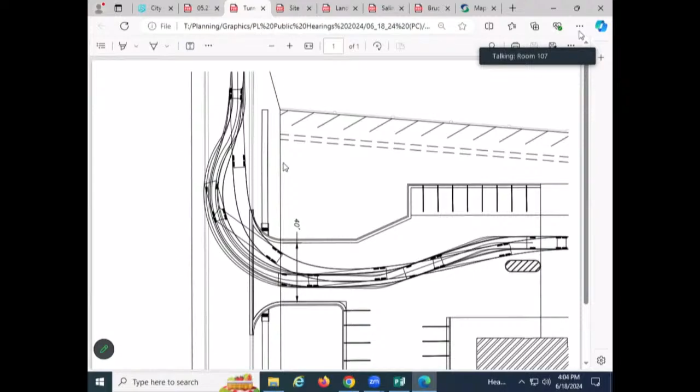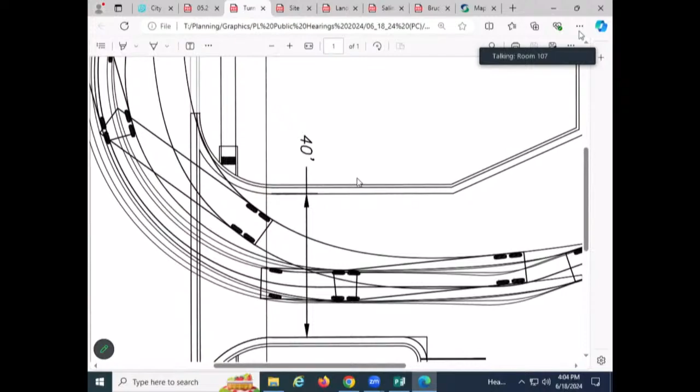Now, when we looked at the revised site plan, we noticed that the opening was 43.5 feet. And when we looked closer at the truck turning template, we discovered that the 40-foot opening that was noted was from the edge of the front end of the concrete curbing apron to the edge of the curbing apron on the other side, rather than face of curb to face of curb. So what that means is the site plan would have to be modified slightly so that it fits within the 40-foot opening that the engineering staff has approved. It would narrow the curb cut opening slightly, but not a lot.

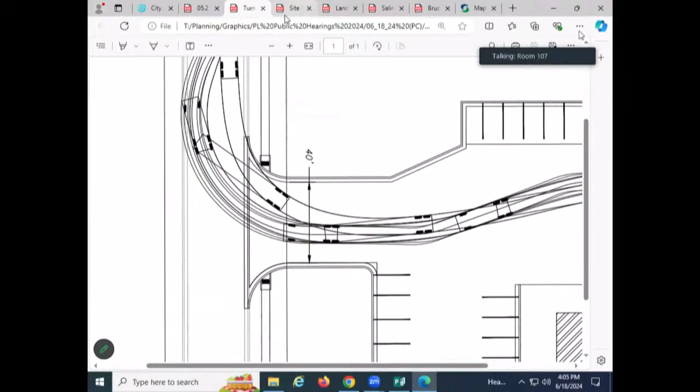So here's the actual site plan, and if you were to measure at the property line, curb to curb, face of the curb to the face of the curb, you'd come out with about 43.5 feet, and so they'll need to narrow that to 40 feet, but that would still fit within the template dimension that the design team has come up with. So on the first item, we believe we do have a solution - a turning template that shows a 40-foot opening would be sufficient. We just need the site plan modified to show the 40-foot opening that the engineering staff has approved, and that would take care of that.

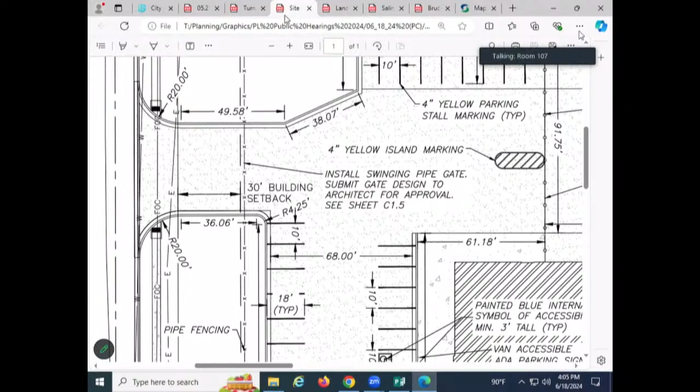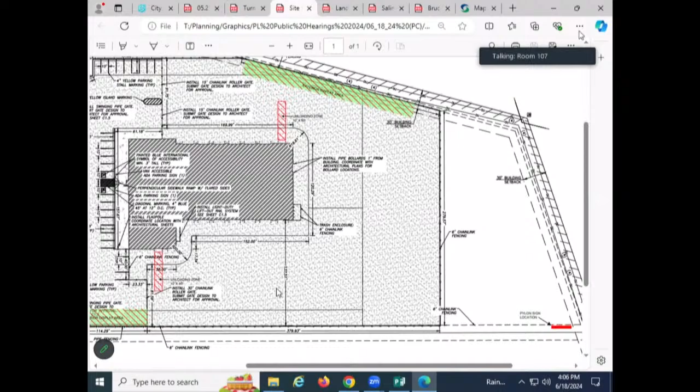The second item was the requirement that all maneuvering, driving areas, and parking areas have to be paved. The design team modified their surfacing, pulling it further to the west. In previous plans, the surfacing went all the way back to the back property line, except for a green space in the southeast corner. They've reduced the surfacing area, and rather than a gravel or crushed milling surface, they've proposed 8-inch thick concrete throughout, so as a truck works its way around the property, all of the maneuvering area as well as the off-street parking area will be paved.

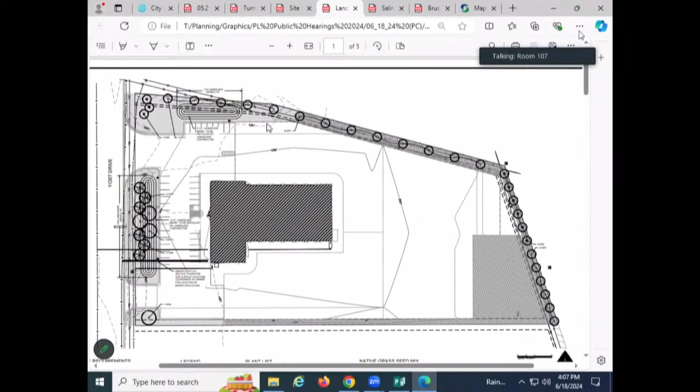Landscaping was the next topic. One challenge of the site was overhead power lines along Waterwell Road and I-135. The Planning Commission previously discussed allowing a substitution of ornamental trees in place of shade trees, so those trees could be planted in the front 30 feet along these frontages without interfering with overhead power lines. The applicant revised their landscape planting plan to surround the property on all three frontages with trees, using ornamental trees instead of shade trees because of the power lines. That sufficiently addresses our previous comments on landscaping.

For drainage, a drainage study was needed as part of the platting of this property in 2023. The applicant submitted a copy of the drainage study to the Kansas Department of Transportation for review. A staff individual with KDOT has opined on the plan, but we still do not have the KDOT right-of-way discharge permit, which is always required when right-of-way is adjacent to a property directing water into it. Those discharge permits ensure we don't have erosion or water that would overcapacitate KDOT's right-of-way drainage system.

We do have written email correspondence from an individual with KDOT saying the plan looks good, so we're on the right track, but we still need an actual discharge permit showing the plan approved by KDOT. We've made progress, but haven't yet gotten the full permit required before a building permit can be issued. Staff believes that can be worked out after this board meeting as part of the building permit process.

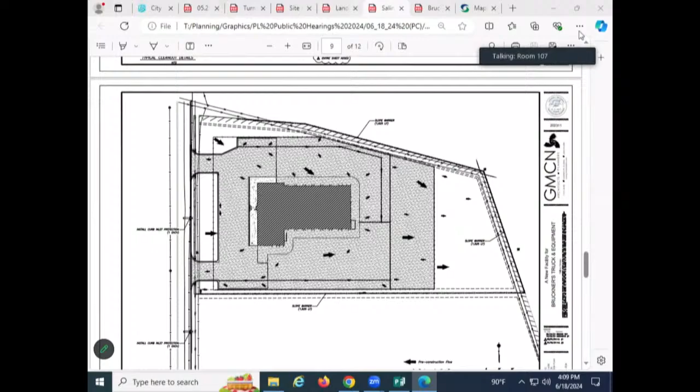I'll see if I can... I'm trying to get to my drawings here. It's not... give me a moment.

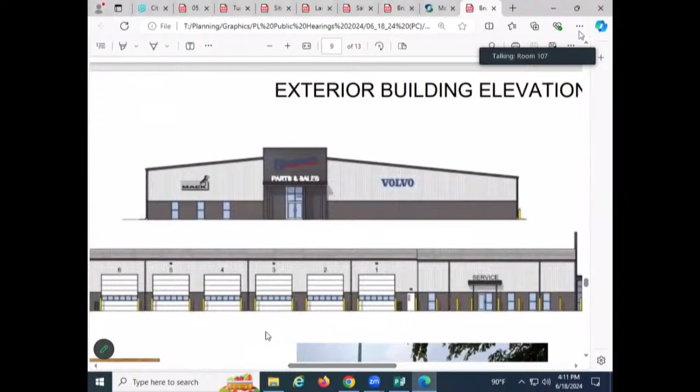And this is the color rendering of that same submittal. You can see that both the front facade and the surrounding facades have that same characteristic, with gray wainscoting and white upper body exterior color. These are the black and white images of all four sides.

So that's the exterior that is being proposed, and we feel the applicant clarified that well in their last meeting.

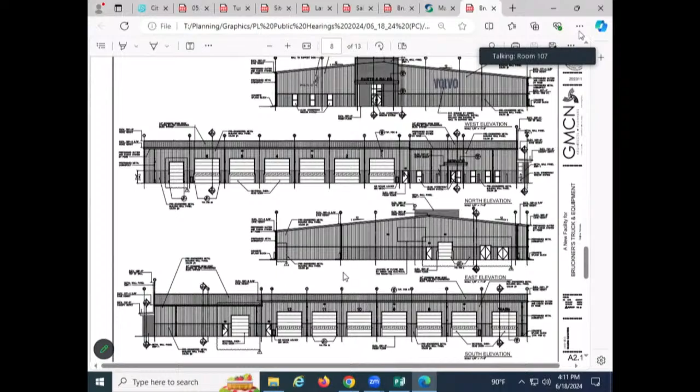The seventh item to address would be that a public sidewalk along Yost Drive would be required, and the applicant has that on their plan and is proposing to construct that. Last of all, we need to make sure that all drawings submitted for building permit review have an address that notifies this property as 3615 Yost Drive.

So those were all of the different correction items we've been working with the applicant on. We believe they have been sufficiently addressed, or nearly addressed, where the Planning Commission could approve the proposed plans, and the minor details still left to be corrected can be taken care of through the building permit process. So we do have a recommendation that the plan be approved with a number of conditions, listed on pages 16 and 17.

As part of this, because it's a planned development, we not only review this as a conditional use permit, but anytime we have a planned commercial project, the Planning Commission reviews and approves what we call a final site development plan, and that will also be required here. In this case, the information submitted is the same information you'd have on a final site development plan, so we feel that going through this conditional use permit review is the same as going through a final site development plan review. However, we need an actual document at the end of this process labeled as a final site development plan that we can stamp approved and put in the file.

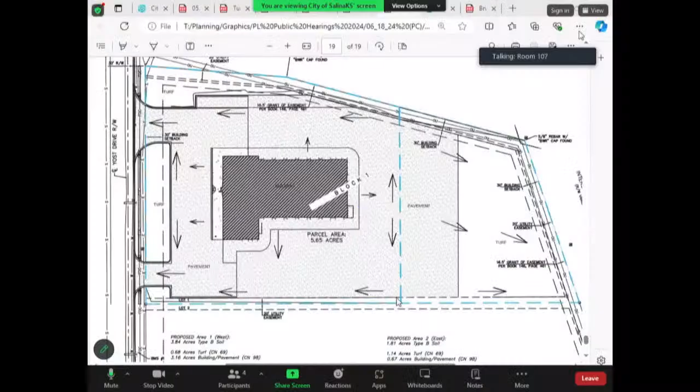In this case, if we look at the drainage plan — I'll pull it up. So this is the drainage plan. I don't know how well it shows up, but all of the building water runoff and the pavement around the building is designed to work its way either to the north and then to the west, to the south and then to the west, or even to the east, south, and then west. So this blue line you see here — the site is going to be graded and constructed so that water will flow from this blue line to Yost Drive.

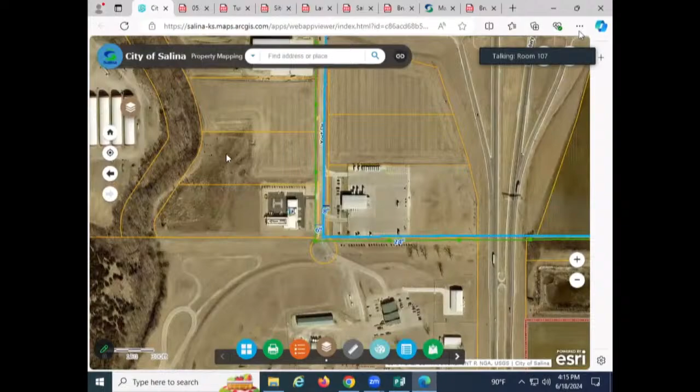And underneath Yost Drive, we have an inlet system with pipes that captures the water — let me get the aerial photo. It captures it, and this big borrow pit drainage detention area back here is designed to hold water in drainage and storm drainage situations. So water gets to Yost Drive and it gets piped back to this borrow pit detention pond at the southwest corner of the Yost addition. That's how drainage on the site is designed to work.

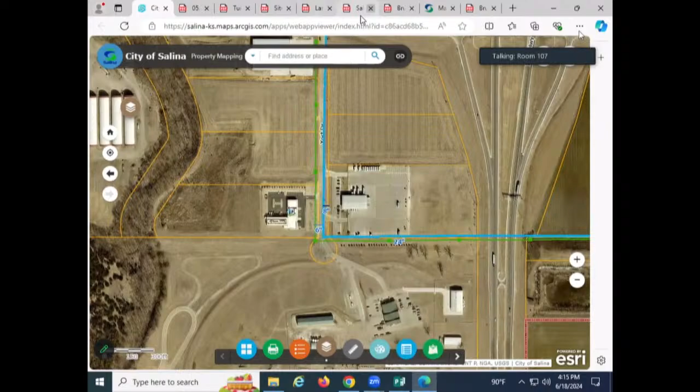Most of the drainage is directed to Yost Drive. However, there is this eastern portion here that is intended to sheet flow over into the KDOT right-of-way undetained, and that's what we need the discharge permit from KDOT for, because they've always required that for any instance when water is being directed onto their right-of-way. So, as it's getting to be a long answer, the idea is that we get water going where it needs to go. In this case, we'd capture the runoff from the building and make sure it's going to the west, to Yost. And that was my disconnect — when it was funneling toward Yost, I wasn't sure about the discharge or the extra permit from KDOT, but yeah, I see the backside of it. I got you.

And Dustin, I kind of have a question along those lines too.

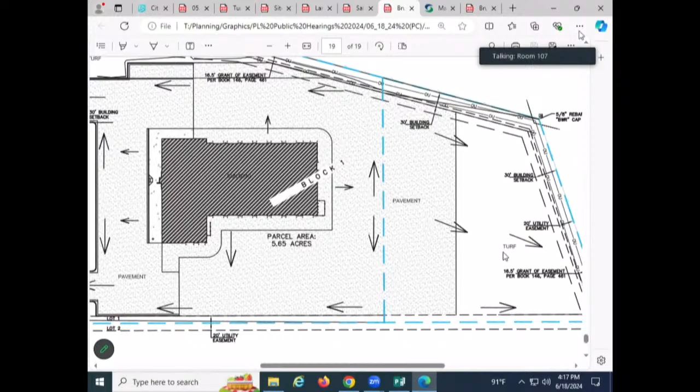So that area that they changed had originally been pavement or some kind of multi-surface material. Is that going to be green space now? Yeah, so if we zoom in here, all of the patterned, shaded area that you see is pavement, 8-inch concrete. Once you get east of this black line to the white open area, that's going to be turf grass. Very good, and that'll slow down that water flow. That will slow it down some, yes. Okay, very good. Any other questions of staff?

On the KDOT right-of-way discharge permit, to your knowledge, can the individual from KDOT who said your plan is good issue that permit? We're not sure about that, which is why we're not sure it came from the right source. The other part we'd like KDOT to clarify: we looked at an aerial photo of the whole I-135 corridor and found about 15 detention ponds that drain into the KDOT right-of-way. This is the only project we're aware of that KDOT has supposedly approved without a detention pond controlling the release. The email we have isn't really sufficient, because in every other case they said you can only do controlled release out of a pond, and in this case they didn't say that.

So we want to get that clarified. Up and down the corridor you have Long McArthur, Ford, and Marshall Motors with a pond that discharges. Menards has a pond and discharges. Walmart has a pond and discharges. Olive Garden has a pond behind it that discharges. There's one behind the Goodwill store too, and in every case KDOT says you can only discharge out of a pond, you can't just drain your site into the right-of-way. So we think we're in a good position, but we want to verify that through the right-of-way discharge permit, because that will have the details and we know it will come from someone with the right authority. Every one in the past we've had is from the District 2 engineer, and this email is not from the District 2 engineer.

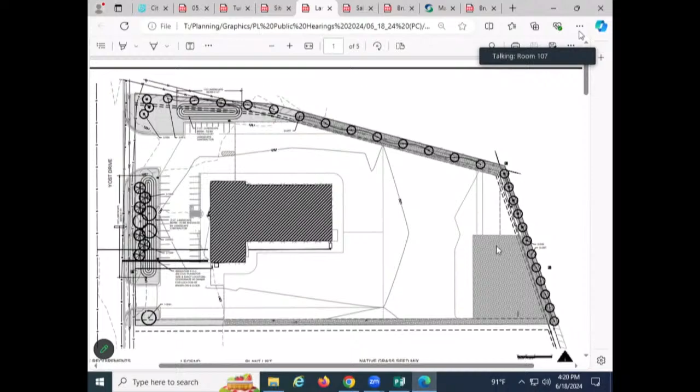If you go back to the landscape plan, I kept looking at it and kept saying, this must be a detention basin. I kept asking, is this a detention basin? The answer kept being no. We don't propose a detention basin, but if KDOT is approving this without one, we just want that spelled out in a right-of-way permit, because that's different than what they've done historically up and down I-135 and I-70. Even out where Foley Equipment and Kenworth is, there's a pond that discharges into the I-70 right-of-way, and they would only accept discharge from a pond. So, this is a pretty small area, though.

Can I jump in and add a little context? I'll be sure to contact KDOT and see what they say. I think the reason is that right now the water on that site is all headed toward I-135, and we are discharging at a slower rate than it's leaving now. So I believe that's why they're saying they don't need a pond—it's leaving the site at a slower rate per the drainage study than it is currently. So, worst case scenario, if KDOT says you have to have a pond, you could work with staff and get that done? Yes. Okay, very good, thank you.

Any other further questions of staff? This is a clerical question, forgive my ignorance, but why are some of these answers in red and some in green in this paperwork? Approved or not approved? Yeah, so I tried to make it easier to read, and maybe it made it worse. Below is a list of issues and how Bruckner's design team has addressed each item.

Items colored in green have been satisfactorily addressed, while items colored in red are still needing to be worked out. So the idea is that I went through the list we previously had. I didn't change the list, but I added in the red items that still might need a correction, even if it's slight.

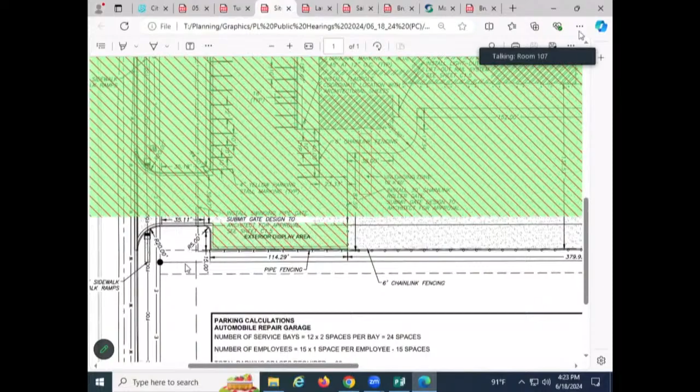Yeah, so if we were to zoom in on the site plan. Well, when I zoom in it's getting weird on me, it's giving me some lines. But there's a sidewalk right here behind the property line that's being proposed, or right in front of the property line, off the property line in the right of way that's being proposed.

And that is required for all new development. So all new subdivision requires public sidewalks on public streets. The only exception to that is if you have a cul-de-sac or dead-end street that's 600 feet or less. So if you're in a residential subdivision with a cul-de-sac that has 4 houses on it or something, they're not required to have a sidewalk.

This is a dead-end cul-de-sac street, but it's 1,500 some feet long, so it's required to have sidewalks. And what we do is we don't build sidewalks at the time the street is built. We wait till after the building is constructed, because if you build the sidewalks first, they'll get destroyed while the building is constructed, and you'll end up having to rebuild them anyway. So sidewalks in new subdivisions are built as lots develop.

What's the requirement for size on the sidewalks? They are required, if they're a curbside sidewalk, a minimum of... some are 5 feet, but if it's a curbside sidewalk, which we discourage, those have to be 5 feet. This one is 4 feet because it's off the property line, not next to the curb, so it meets the minimum requirement. So 4 foot if it's not on the curb, 5 foot if it is.

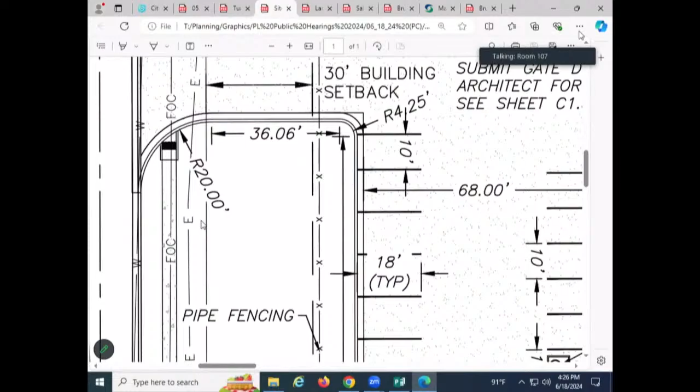I think it was the Foley equipment one where it was the sidewalk to nowhere type of thing, and I wasn't sure if there was any other sidewalk around, if it was just going to be in front of them. Yeah, that was with the Beck's Seeds project out there, but that was further away.

Yeah, that was addressed at a different level than this, because the streets out there, Yost Drive, is a full curb and gutter street that meets all city standards. The only thing that needs to be completed is the sidewalk, and otherwise it meets all city standards.

Any further questions of staff? Okay, can we hear from the applicant or their representative?

Nick, is that you? Sorry, I have nothing further.

Okay. And you've seen all 10 of the recommendations that the staff has made in terms of this application? Yes, sir. And you're okay with those? Yes.

Any questions of the applicant? All right, anyone from the audience care to address this application? Do we have anybody on the line, Dustin? Everyone online would be part of the Bruckner design team. Okay, very good. All right, we'll bring it back to the Planning Commission for discussion and action.